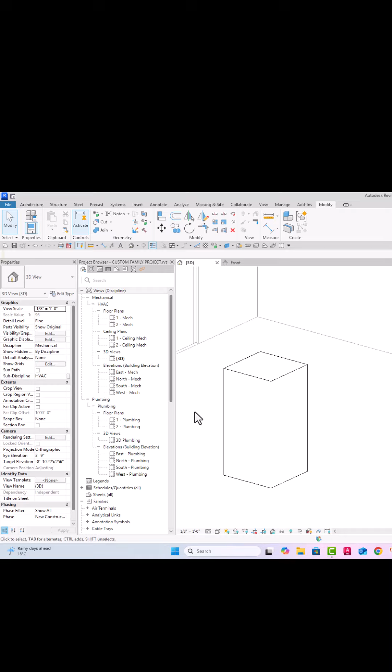Here we're going to show you the end result of a little custom family. We're going to build a piece of mechanical equipment with some parameters and stuff. So let's just have a look at the end result of what we'll build in this little mini series.

Here's a piece of equipment. If you hover over it, it'll tell you it's mechanical equipment. So if you turn mechanical equipment off or make any visual changes, it'll adapt accordingly. If I look in there, this little piece of equipment has connectors on there. It has hydronic supply and return. We can pull pipes off of there.

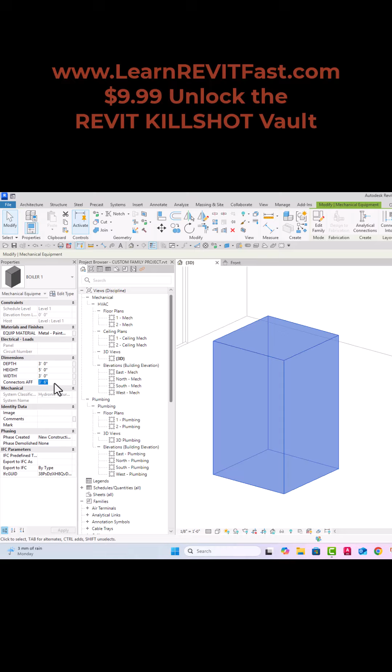So for dimensions, let's just flex this and go depth. Let's change this to say 3 feet deep and 5 feet tall and 3 feet wide. There it goes. And then the connectors are going to stay to the right, and the above finished floor is set to be 3 feet. So I can set that to be 4 feet or up to 5 feet or 4'6" and move those connectors up. So I can position the connectors and the size of the equipment, which is really nice.

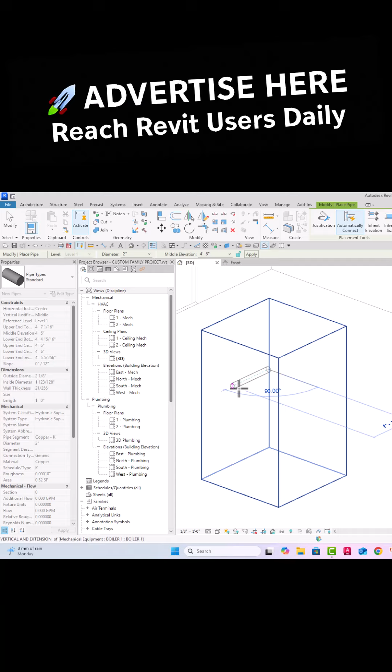And then I can right click on this connector and just say draw pipe, and it'll automatically go onto the right system. So I can pick on there and then drop it down to a foot off the ground or something like that. And then go around the corner and hit escape, pick on here, right click on that connector, draw pipe, come off of there, click down here,

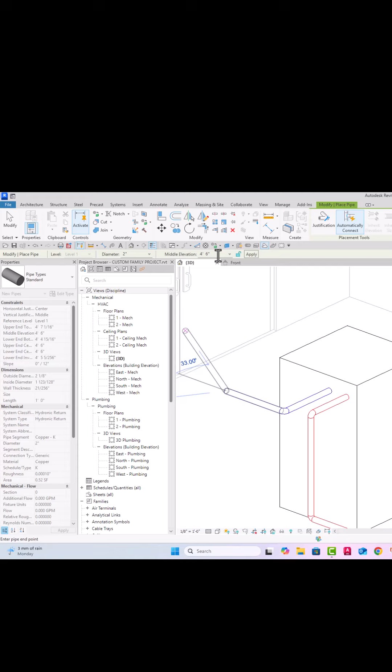maybe go the other way, go down here, use my shift key, and then maybe drop down to 2 feet, and then come around the corner, wherever I happen to go on there. Escape. So, a piece of equipment with some pipe connectors and some parameters to flex the size and the positioning of where those connectors are.

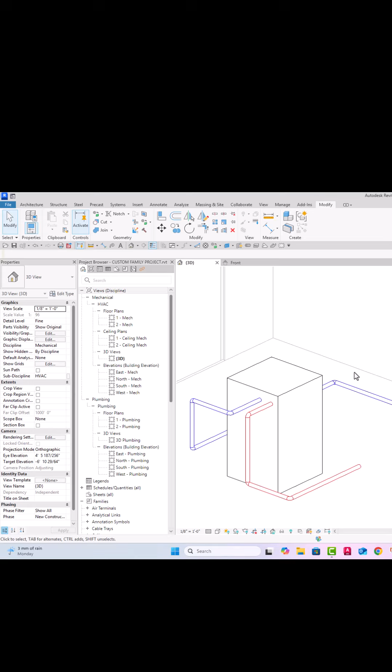In this case, I've predetermined the system type on these hydronic, and I can also change the material on this piece of equipment. I can go into here, and just to be more drastic, I can pick something a little more colorful, click out and change this to be shaded, and then I'll see that in full color. So material as well with the element, and this is just basic getting started.

This could be a VAV unit or a boiler or a hot water tank or a pump or any sort of piece of equipment with any sort of connectors, air connectors, electrical connectors, pipe connectors.